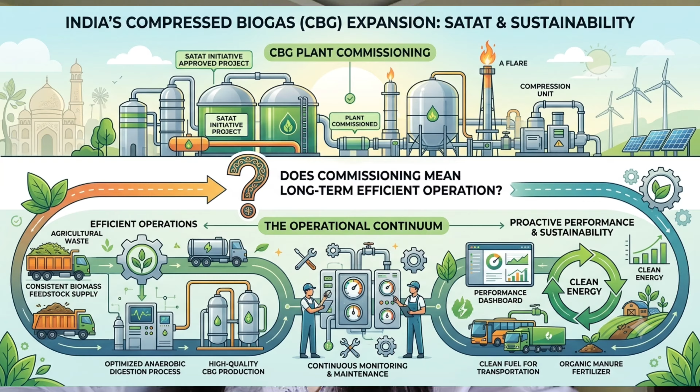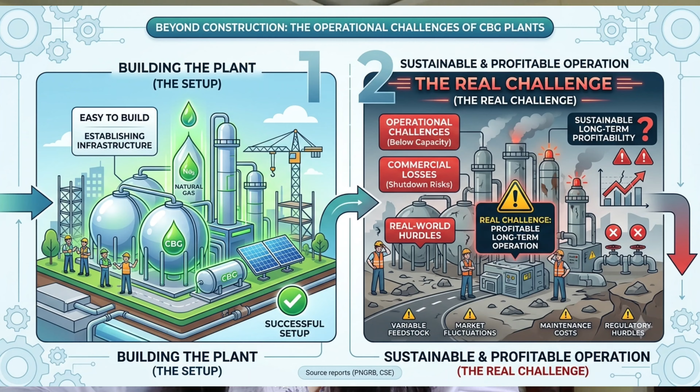According to reports of the Petroleum and Natural Gas Regulatory Board and the Center for Science and Environment, the real challenge is not constructing a CBG plant. It is operating it efficiently, sustainably, and profitably over the long term. So what are the reasons behind these challenges? Let's understand them one by one.

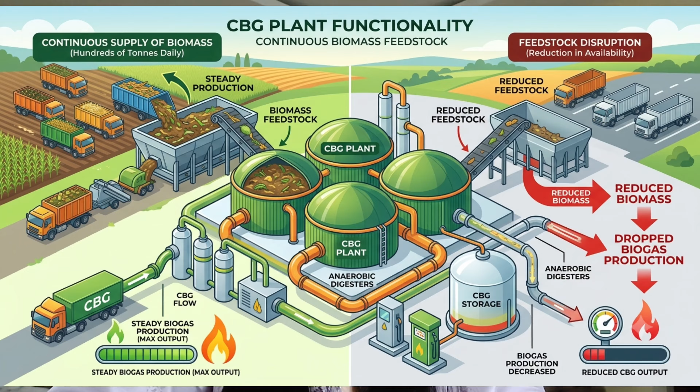Firstly, feedstock availability, the foundation of every CBG plant. A CBG plant cannot function without a continuous supply of biomass. Depending on its capacity, a plant may require hundreds of tons of feedstock every day. Even a small reduction in feedstock availability can significantly decrease biogas production. The problem is that feedstock is not always available throughout the year.

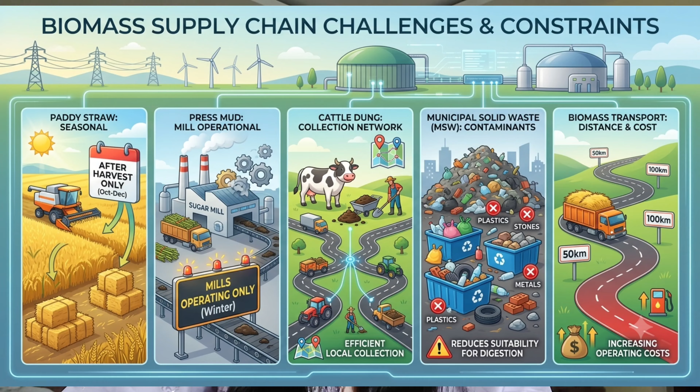For example, paddy straw is available mainly after the harvesting season. Press mud is generated only when sugar mills are operating. Cattle dung collection depends on an efficient local collection network. Municipal solid waste often contains plastics, stones, and other contaminants that reduce its suitability for anaerobic digestion. Transporting biomass over long distances also increases operating costs. Without a reliable feedstock supply, maintaining continuous gas production becomes difficult for CBG plants.

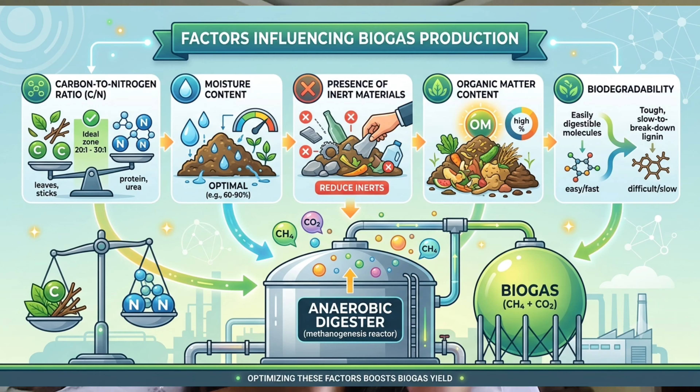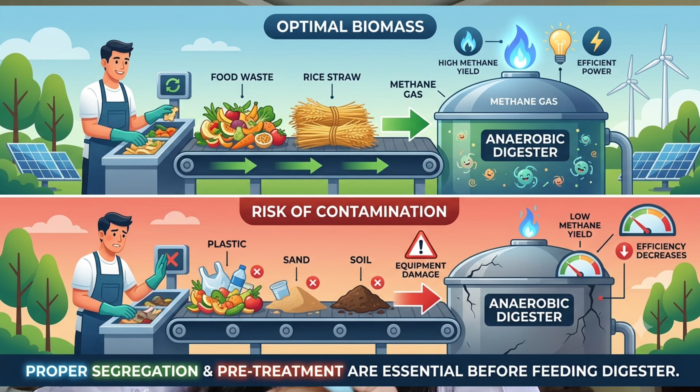Secondly, feedstock quality, because quantity alone is not enough. Even if enough biomass is available, its quality plays a critical role. Biogas production depends on factors such as carbon to nitrogen ratio, moisture content, presence of inert materials, organic matter content, biodegradability, etc. For example, food waste generally produces more methane than rice straw because it is easier for microorganisms to degrade. If the incoming biomass contains excessive plastic, sand, or soil, equipment may be damaged, digestion efficiency decreases, and methane production falls. Therefore, proper segregation and pre-treatment are essential before feeding biomass to the digester.

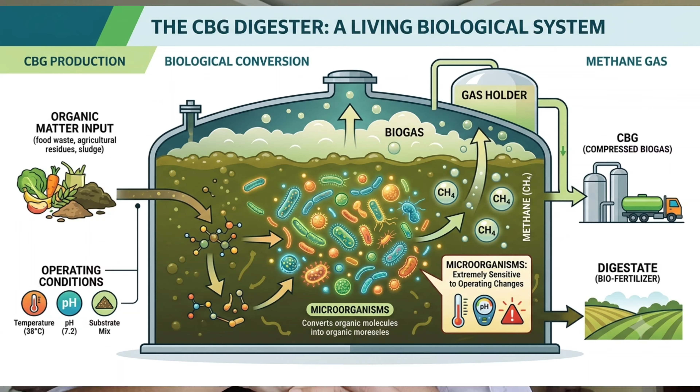Another important challenge inside the CBG plant is biological process instability. One of the most misunderstood aspects of a CBG plant is that it is a biological system. Inside the digester, billions of microorganisms convert organic matter into methane. These microorganisms are extremely sensitive to changes in operating conditions. Several factors can disturb the digestion process, such as sudden changes in pH, temperature fluctuations, organic overloading, ammonia toxicity, accumulation of volatile fatty acids, etc.

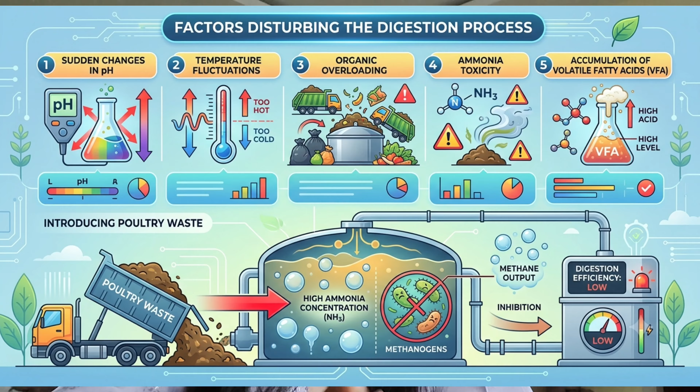For instance, introducing a large quantity of poultry waste without proper control can increase ammonia concentration and inhibit methane producing bacteria. Unlike mechanical equipment, microorganisms require time to recover. In severe cases, restoring stable operation may take weeks.

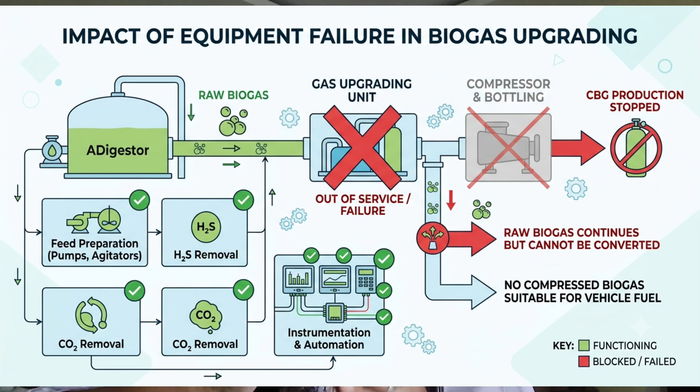One of the most important problems is equipment and technical challenges. Even when biological conditions are ideal, mechanical failures can reduce gas production. Critical equipment includes feed preparation systems, pumps, agitators, hydrogen sulfide removal units, carbon dioxide upgrading systems, compressors, bottling systems, instrumentation and automation, etc. For example, if the gas upgrading unit stops working, raw biogas continues to be produced, but it cannot be converted into compressed biogas suitable for vehicle fuel. This immediately affects the plant's productivity and revenue.

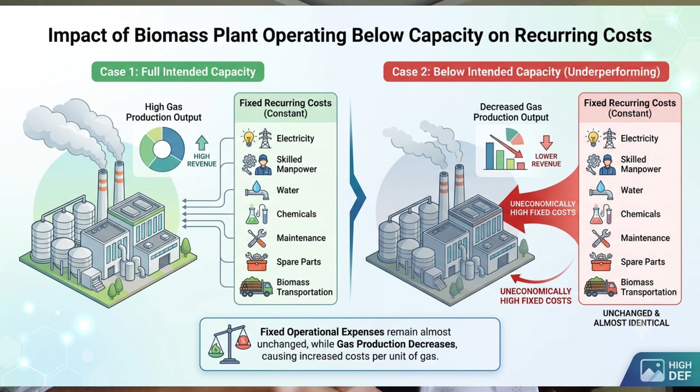Therefore, regular maintenance and timely replacement of critical equipment is essential. Then comes high operating costs. Many plant developers carefully estimate the construction costs but underestimate the operating expenses. Recurring costs include electricity, skilled manpower, water, chemicals, maintenance, spare parts, biomass transportation, etc. If the plant operates below its intended capacity, these costs remain almost unchanged while gas production decreases. As a result, the cost of producing each kilogram of CBG increases significantly, reducing profitability.

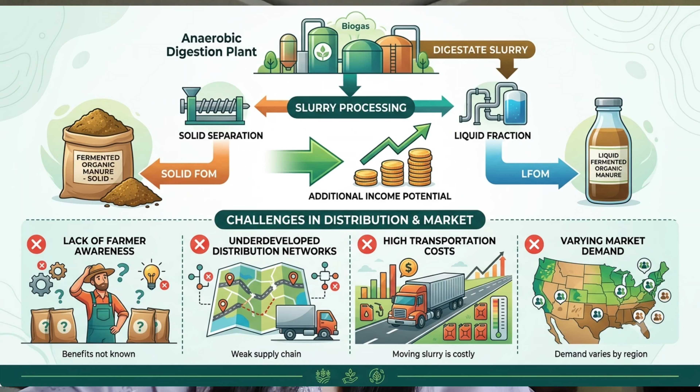There is another important problem: digestate management. After anaerobic digestion, the remaining slurry is processed into fermented organic manure or liquid fermented organic manure. This byproduct has the potential to generate additional income. However, many plants face challenges because farmers are not fully aware of its benefits. Distribution networks are underdeveloped, transportation costs are high, and market demand varies between regions. Without a reliable market for digestate, an important revenue stream is lost.

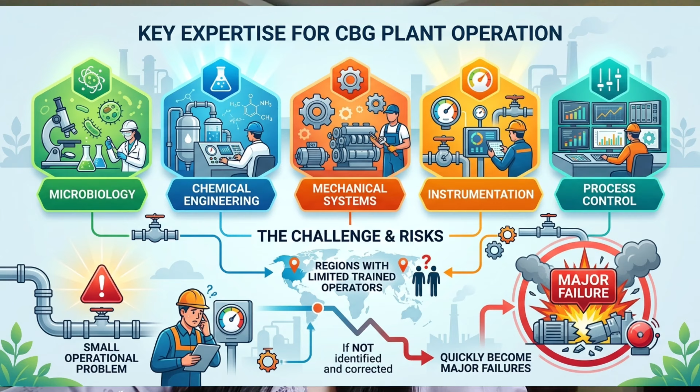Skilled manpower is one of the most important components of an industry or a plant. Likewise, operating a CBG plant requires expertise in microbiology, chemical engineering, mechanical systems, instrumentation, and process control. Unfortunately, trained operators are still limited in many regions. Small operational problems can quickly become major failures if they are not identified and corrected in time. Continuous training and capacity building are essential to improve plant performance.

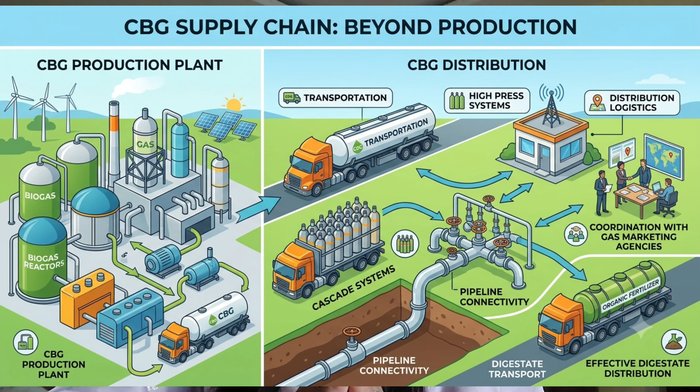And lastly, marketing and gas offtake. Producing CBG is only part of the value chain. The gas must also be delivered efficiently to customers. Plants may face challenges related to transportation, cascade systems, pipeline connectivity, distribution logistics, and coordination with gas marketing agencies. Similarly, digestate also requires an effective distribution system. A technically successful plant may also struggle if its products cannot reach the market efficiently.

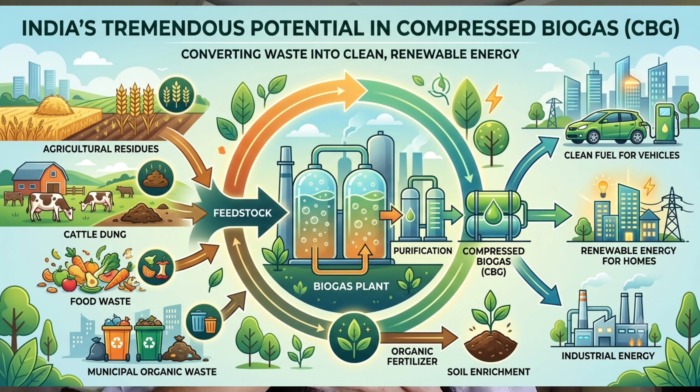India has tremendous potential to become a global leader in compressed biogas. The country generates enormous quantities of agricultural residues, cattle dung, food waste, and municipal organic waste that can be converted into clean, renewable energy. However, experience from operational plants clearly shows that building a CBG plant is only the first step. Long-term success depends on reliable feedstock supply, stable biological processes, efficient technology, skilled operators, sustainable economics, and strong marketing systems.

Understanding these challenges is essential for improving plant performance and accelerating India's bioenergy mission.